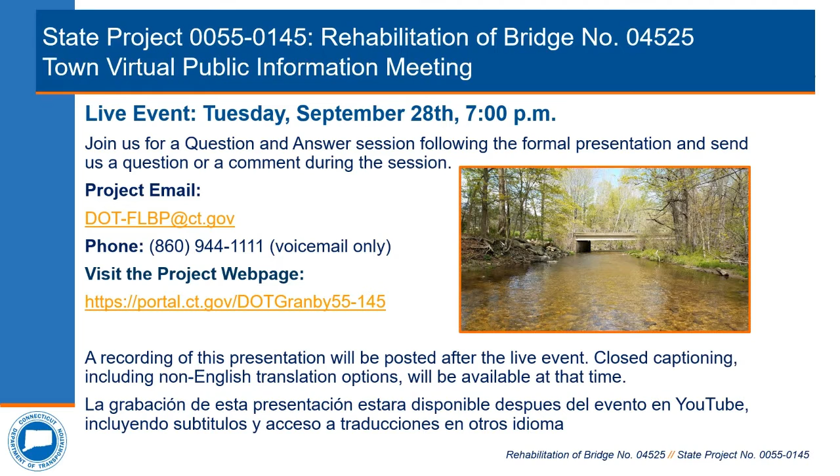On behalf of the Connecticut Department of Transportation and the town of Granby, I would like to welcome you all for attending this public informational meeting for State Project number 55-145, Rehabilitation of Bridge number 04525, located on Simsbury Road over the west branch of Salmon Brook. My name is Preeti Bardwaj, and I am the project manager assigned to this project. We appreciate your willingness to participate in this forum virtually, and we hope that you will find this meeting both interesting and informative.

I would now like to explain some of the goals and format for tonight's meeting. I will be explaining how you will be able to interact with the project team. I will be explaining how this project is funded in the Federal Local Bridge DMS, or Design Managed by the State program. This will be followed by having some welcoming remarks by Mr. Kirk Severance, Public Works Director from the town of Granby. I will then introduce the project design team, and that includes the department's front office leadership, the department's design team, and our consultant liaison engineer team.

This will then be followed with a technical portion of the design, which will include the condition of the existing structure, the purpose and need for the project, and the recommended design solution, which has progressed to a 30% design completion. As part of the department's public outreach program, it is at this point now that we are reaching out to you, the public, while it is still early in the design process, to receive any comments and concerns and answer any questions that you may also have. We also will be explaining the rights-of-way process. And lastly, we will have a live question and answer session.

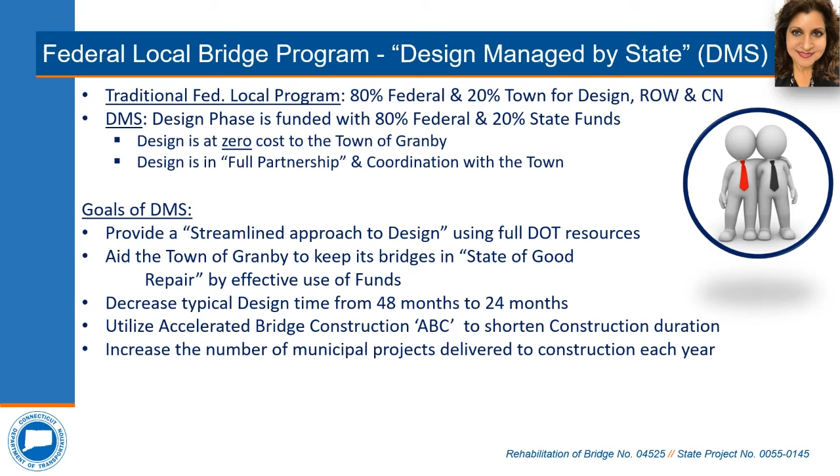Thank you, Preeti. As previously stated, my name is Kirk Severance and I am the Public Works Director for the town of Granby. The Connecticut DOT performed safety inspections for all bridges over 20 feet in length at 2-year intervals. It was determined that the Simsbury Road Bridge was one of the bridges in town needing repairs. We knew that the bridge needed to be rehabilitated, and we are looking for the most efficient way to proceed and stay within the guidelines of the allocated bond money.

Traditionally, the town would have selected and hired a consultant to develop the design, and they would have been responsible for navigating through the design process, with the town covering 20% of the design costs. As mentioned, when the Department of Transportation offered the DMS program to the town, we felt it was absolutely the way to go for the town, since the state has pre-selected consultants with the knowledge of the design process. This would result in both early completion of the design and construction, and not to mention the cost savings.

We started meeting with the state in July of 2019 to get an understanding of how the program worked and how it may benefit the town. After several more meetings with the state, the town recognized that this program would be a good joint effort and agreed to go forward with it.

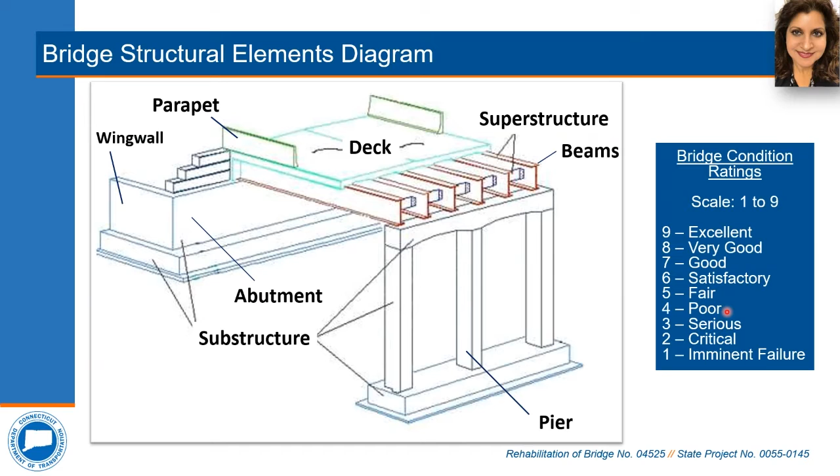Thank you, Preeti. Good evening, everyone. I will be going through some of the specifics of the current condition of bridge number 4525, which carries Simsbury Road over the west branch of the Salmon Brook. I will also present the proposed work under project 55-145, which has been initiated to rehabilitate bridge number 4525.

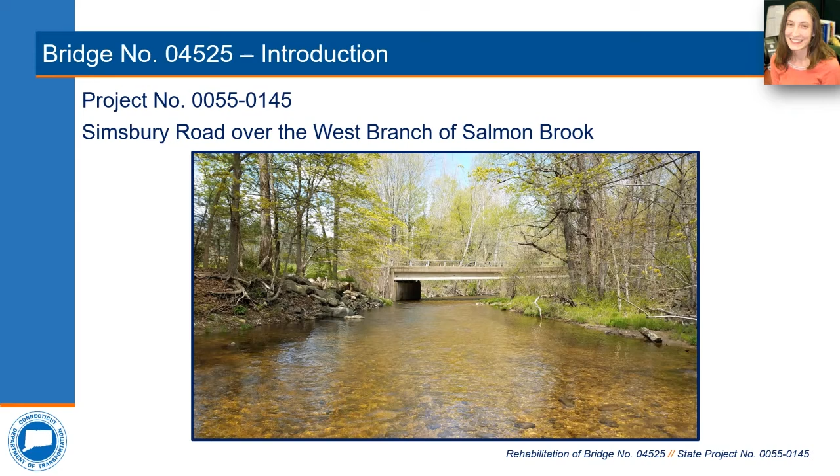Bridge 4525 is located here and carries Simsbury Road, which runs in the north-south direction, over the west branch of the Salmon Brook, which flows generally from the northwest to the southeast. The bridge is located within the West Granby Historic District. However, the bridge is not eligible for an individual historic listing, nor is it considered to be a contributing element to the historic district.

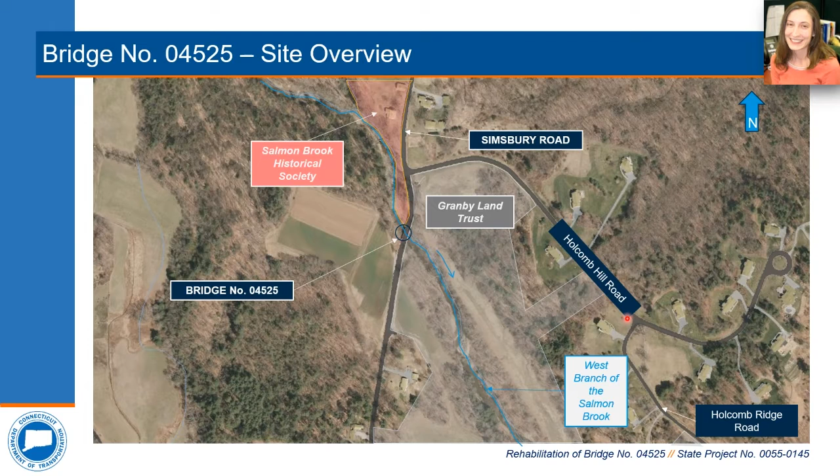The property at the northwest corner is owned by the Salmon Brook Historical Society. The property to the east of the bridge is owned by the Granby Land Trust. Simsbury Road in this area is primarily farmland and residential. There is one residential street, Holcomb Hill Road, located just north of the bridge.

The bridge was constructed in 1956 and carries an average of 1,422 vehicles per day. The bridge has a lane of traffic in each direction, northbound and southbound on Simsbury Road. The curb-to-curb width is 22 feet. The bridge consists of two spans, span 1 and span 2, each with a span length of 50 feet 10 inches. The spans are supported by abutments, south abutment here, north abutment here, and a pier wall in the center.

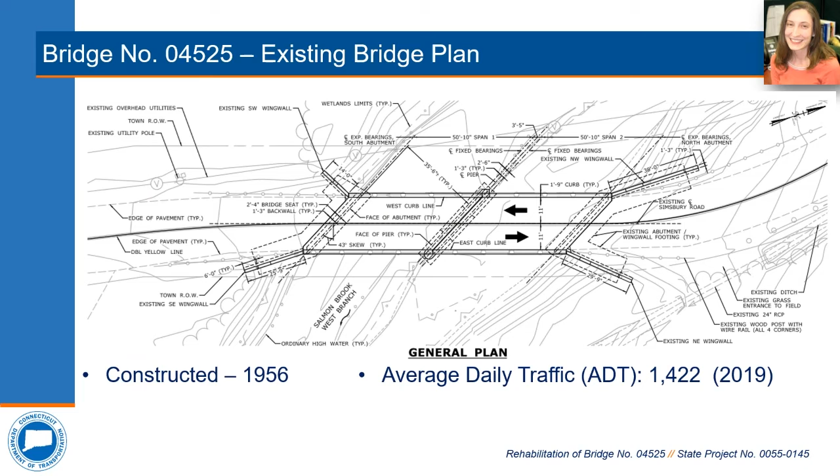On the west side of the bridge, there are overhead utilities. The bridge provides a 22-foot wide roadway, and the superstructure consists of 5 pre-stressed concrete I-beams that support a reinforced concrete slab deck topped with a bituminous concrete wearing surface. On both sides of the roadway, there are bridge rails that consist of steel H-beams and 2 wire cables. This type of bridge rail does not meet current safety standards.

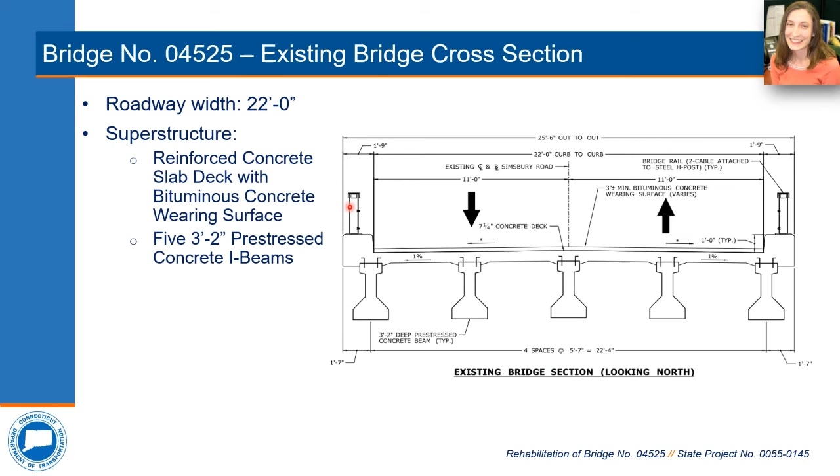The existing bridge has a total length of 111 feet, made up of the 2 spans that are of equal span length. Each span is supported by a reinforced concrete abutment and a reinforced concrete pier wall. These 3 elements make up the substructure and are built on spread footings founded on rock. Because it's founded on rock, scour is not a concern at this site. As for the hydraulic design, for the design storm, which is the 100-year storm event, there is no underclearance and no freeboard on this bridge.

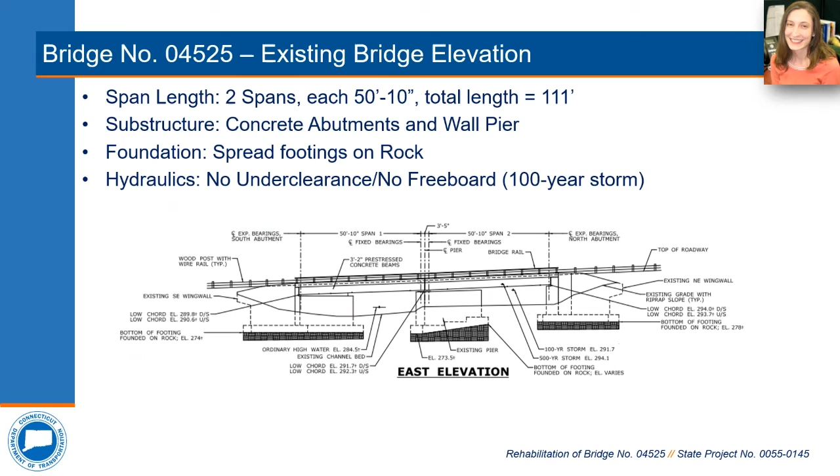As Pretty mentioned previously, during the biennial inspections, the bridge inspectors determine condition ratings for each of the major elements of the bridge. Based on the inspection performed on this bridge in 2019, the deck is considered to be in fair condition. The superstructure is in good condition, meaning there are minor deficiencies noted. The substructure is in fair condition, the approach is in very good condition, and the channel and channel protection is in fair condition. The inspectors also look at other elements of the bridge, such as roadway alignment and deck geometry.

On this bridge, the deck geometry is considered to be substandard due to insufficient roadway width. Because the deck geometry is substandard, the bridge is considered to be functionally obsolete.

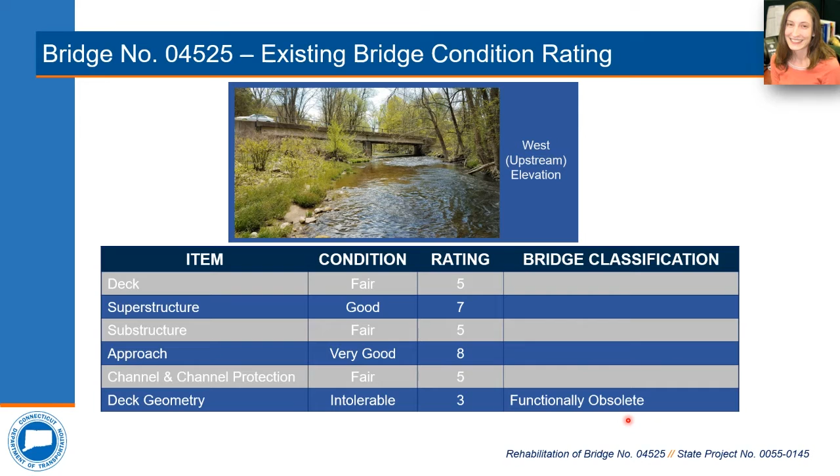So to get you acquainted with the existing conditions of the bridge, here are some photos of the bridge. This photo on the left is the west elevation, or the upstream side of the bridge. You can see here the two spans.

The Salmon Brook primarily flows under this span, span 1. And on this side, there is a lot of sand that's built up and vegetation, mostly blocking off water from flowing under span 2.

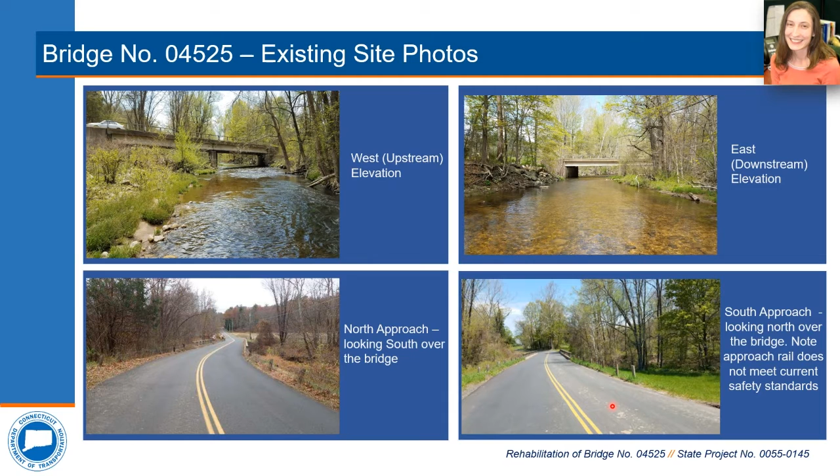Something to note, the approach rail consists of timber posts and two cable wires attached to the posts, and this type of system does not meet current safety standards.

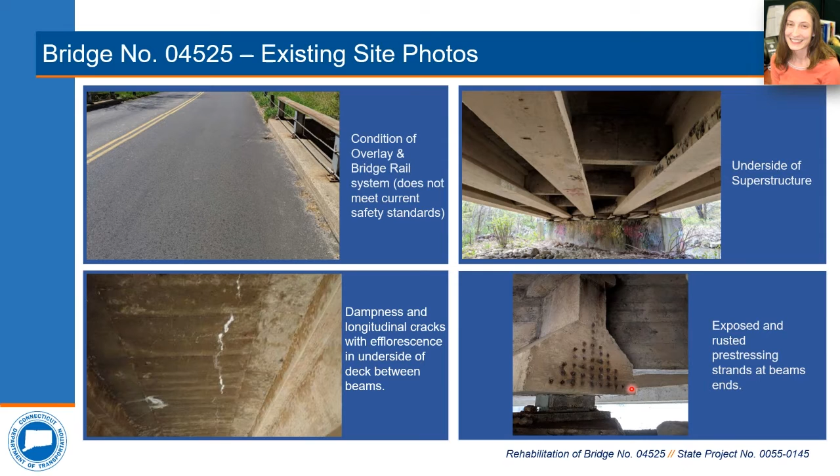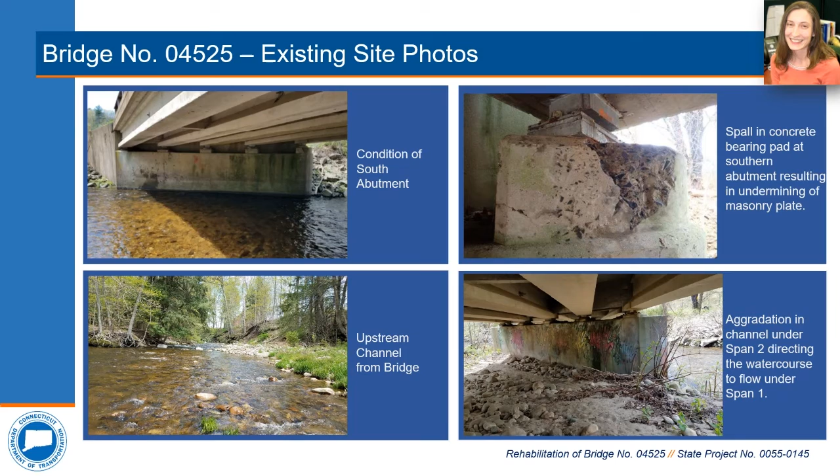So the primary purpose of this project is to address the functional obsolescence of the bridge, which is due to inadequate roadway width on the bridge. The existing curb-to-curb width is 22 feet. Per state and federal standards, a minimum curb-to-curb width of 24 feet is required based on the number of vehicles that travel over the bridge each day, in this case about 1,400 vehicles.

Per town of Granby standards, a curb-to-curb width of 28 feet is required for new local roads with over 60 lots. Since Simsbury Road was built prior to this town roadway standard being established, and no major reconstruction of the road is proposed under this project, less than 28 feet is acceptable.

In addition, the bridge and approach rail systems do not meet current safety standards and need to be upgraded. Lastly, the bridge is 65 years old, and based on the biennial inspection, there are some deficiencies that need to be addressed to extend the service life of the bridge.

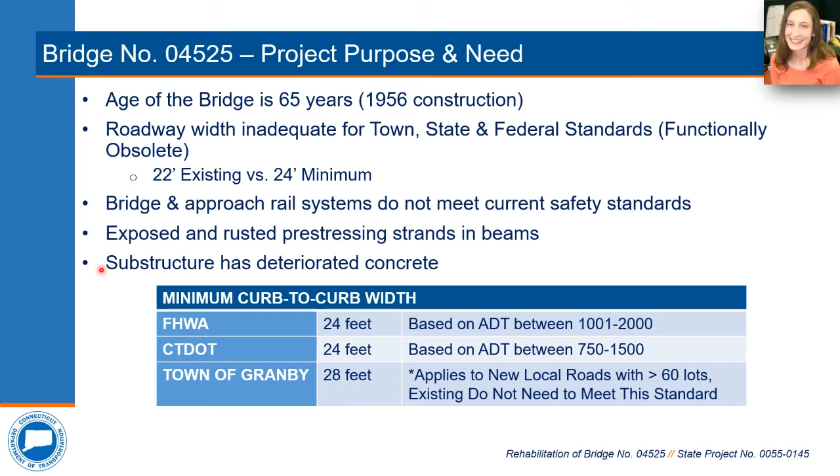Some of these items are the rusted pre-stressing strands in the I-beams and the concrete deterioration in the substructure, especially at the concrete pads under the bearings.

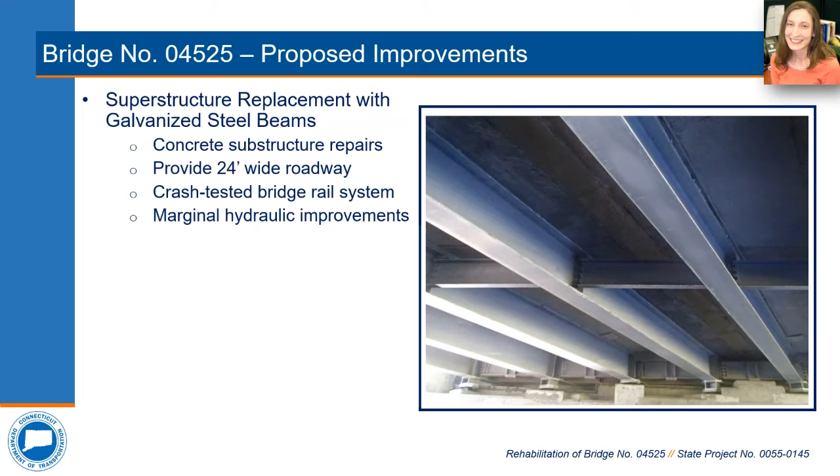In addition, new crash-tested bridge rail will be installed on both sides of the roadway. Also included in this project are concrete substructure repairs to address deficiencies noted in the inspection report. And then with this new superstructure, there are some marginal hydraulic improvements because the superstructure depth is a little shallower than the existing one, so we are able to raise the low chord a little bit to help water pass under the bridge.

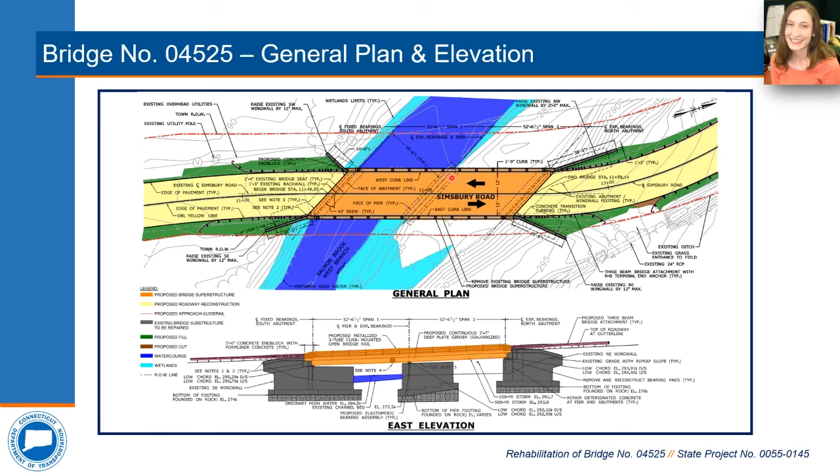Here's the roadway profile that's proposed under this project. We're proposing to maintain the existing roadway profile to minimize the extent of the approach roadway reconstruction on both sides. And as I mentioned, with the use of continuous steel beams, the superstructure depth is slightly shallower than the existing, so we're able to raise the low chord slightly to help pass the 100-year storm better. More water can flow underneath the bridge.

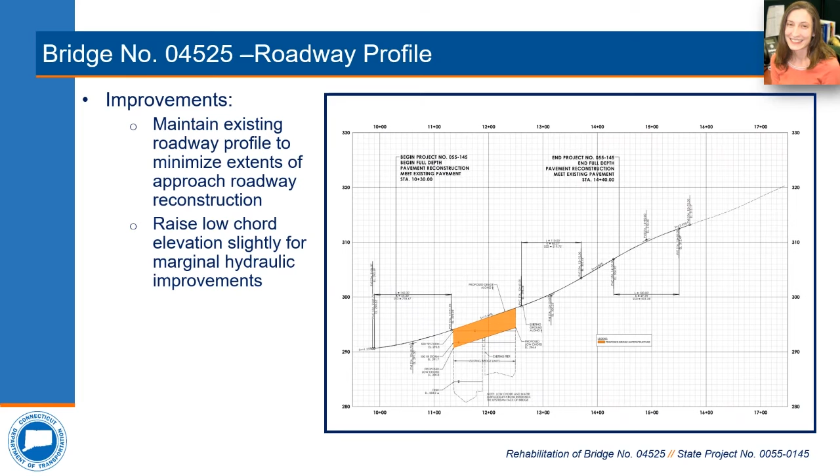On this slide, we have the proposed roadway plan. The orange represents the limits of the bridge superstructure replacement. The darker blue represents the limits of the watercourse, and the lighter blue represents the wetland limits. The yellow on both sides of the bridge represents the proposed roadway reconstruction.

At the south side of the bridge, approximately 115 feet will be reconstructed, and at the north side, approximately 180 feet will be reconstructed. The green and brown represent the fill and cut limits, respectively, associated with the construction of the slightly wider roadway within the project limits. The light gray on both sides represents existing roadway, which will not be altered as part of this project.

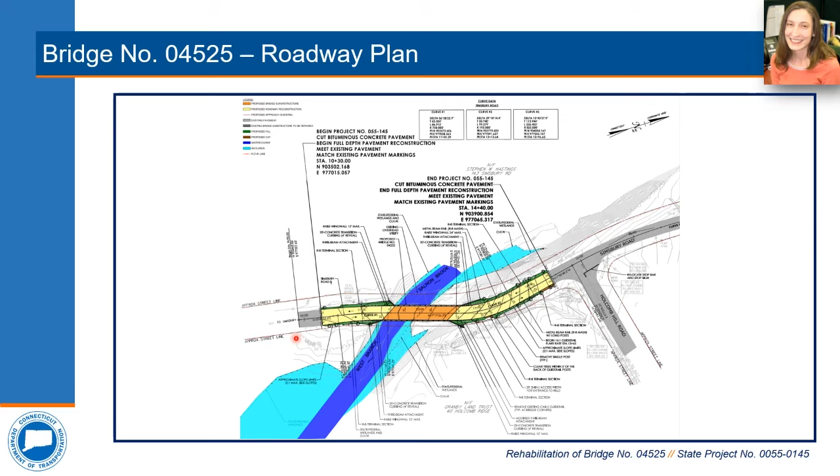To complete construction, the proposed maintenance and protection of traffic involves a full bridge closure with a detour of traffic. This method is proposed because it is far safer for the contractor and workers, as well as for residents and commuters.

With stage construction, the contractor is operating equipment very close to the travel lane, whereas with the full bridge closure, the contractor has the full roadway width, and we don't have to worry about adjacent vehicles being so close to equipment that's moving around.

The detour is proposed to be in place for approximately 7 months, or one construction season, which typically occurs from April through November. The detour route is 6.9 miles long and uses Simsbury Road, Barn Door Hill Road, Route 20, and West Granby Road.

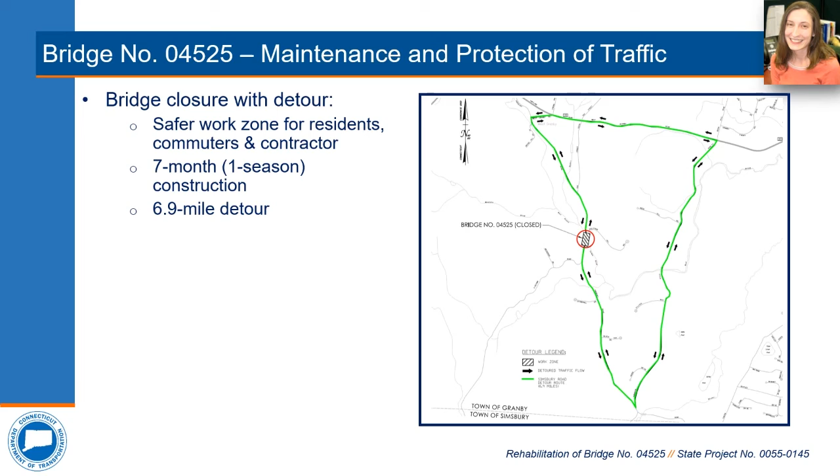As I mentioned previously, the overhead utilities located to the west of the bridge can remain in place throughout construction, so there are no utility impacts associated with this project.

As for environmental impacts, some tree clearing will be necessary on the side of the road to perform the work, but otherwise minimal temporary wetland and watercourse impacts are anticipated.

This is another benefit of the proposed full bridge closure and detour of traffic. The contractor can perform most of the work from the roadway and therefore doesn't need to drive equipment into the watercourse or the wetlands.

So we're anticipating for permits that we'll need a Town of Granby Inland Wetlands permit, flood management certification, an MOU, and a U.S. Army Corps of Engineers permit, either the self-verification or a pre-construction notification permit.

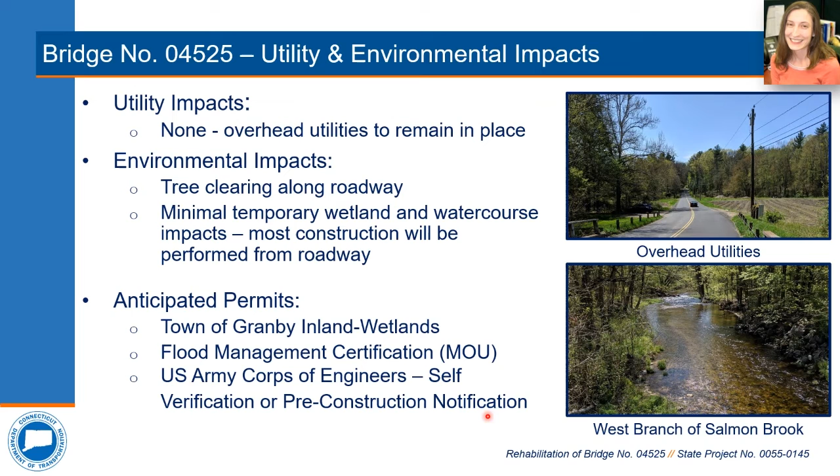As for right-of-way impacts, we generally have very few associated with the proposed project. Most of the work can be performed within the town's right-of-way. There is a portion of the existing northeast wing wall located outside the town's right-of-way, within the limits of the Granby Land Trust property. So a small partial take is proposed to keep that wing wall within the town's right-of-way so that in the future they can access it to maintain it if need be.

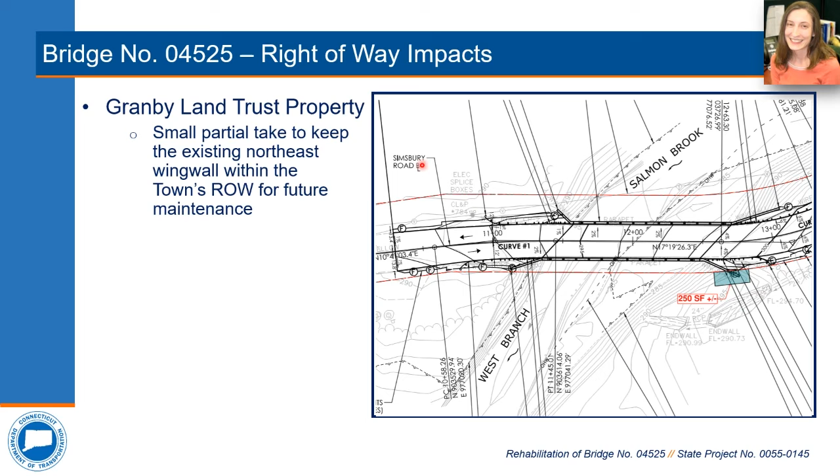So I'm going to turn it over now to Dennis McDonald from the department's Division of Rights-of-Way, and he'll describe a little more in depth the right-of-way process. Good evening, everyone. My name is Dennis McDonald, and I'm a representative from the Connecticut Department of Transportation, Division of Rights-of-Way. I'm just going to provide a brief overview of the right-of-way process.

So the function of the Division of Rights-of-Way is to acquire all property and property rights necessary for the project. This is done in accordance with Connecticut General Statute Section 13A73, 13a-98e, and the Uniform Relocation Assistance and Real Property Acquisition Policies Act of 1970 as amended. Your typical right-of-way impacts include partial acquisitions, easements, and rights. Impacts are subject to change as the design progresses, but this gives a general idea of typical property impacts.

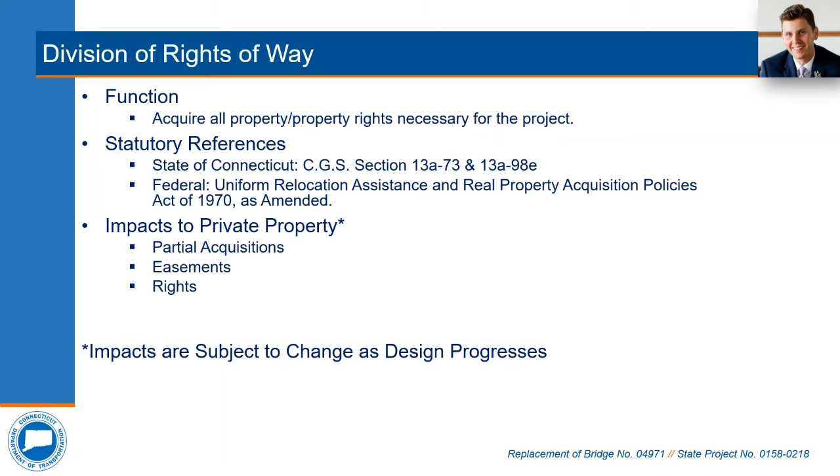Once property impacts have been established, each impacted property owner will receive a letter of intent to acquire along with a property acquisition map. The letter essentially initiates the right-of-way process, and the map provides a detailed overview of the specific right-of-way impacts. Soon after the letter is received, an evaluation process will take place, and once a value has been established, each impacted property owner will receive a written offer of compensation.

Property owners will be given time to consider the offer and negotiate should they wish. If an agreement is reached, an acceptance document will be signed, and a closing will take place at a later date. If an agreement is not reached for whatever reason, the state will utilize its power of eminent domain and acquire the property rights through the condemnation process.

Now, I understand this has a negative connotation, but many times this is done to keep a project on schedule. If the state elects to pursue eminent domain, the original offer is deposited in the court system, and property owners can continue negotiations or file a formal appeal for a reassessment of damages through the court system. Please note all appeals must be filed within 6 months from the date in which the state files for eminent domain.

And that is all I have for tonight. Thank you for your time.

Thank you, Dennis, for the summary of the right-of-way process. So assuming we get approved environmental permits and all right-of-way acquisitions in time, construction is anticipated to start in spring 2024, and again it is anticipated to take 7 months, or one construction season, meaning April through November. The estimated construction cost at this point is $2,120,000. The construction cost will be covered using 80% federal funds and 20% town funds.

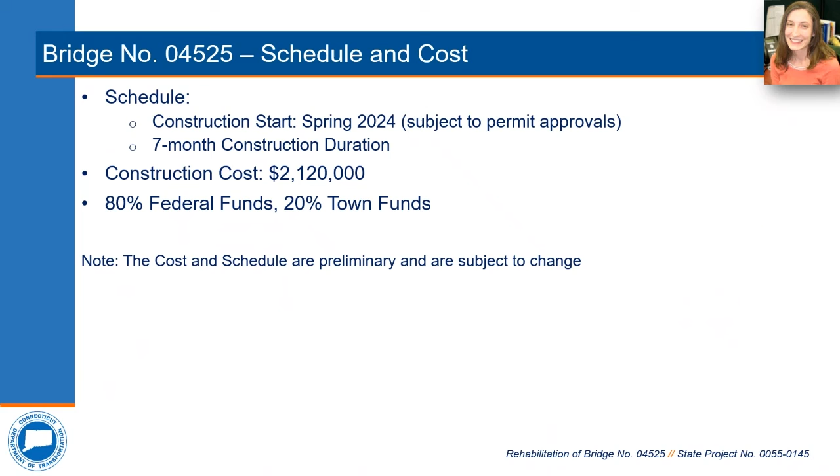Okay, thank you very much, Tracy and Anand. Next question. How will fire, EMS, mail, school bus routes be impacted? Would CHA first like to take this question? And if the town would also like to add anything further to their answer, they're welcome to do so as well. Sure. So one of the things we are going to do during the design phase of the project is make sure that we are coordinating with all the emergency units and emergency services so that they are well aware of the detour route, the actual time of construction, so that they can sort of plan ahead.

And then Kirk, if you could add the town's perspective. Yeah, certainly. We have been working all the way through all three of the bridges with fire, police, and ambulance, and they are well aware of what we're going to need to do. And even prior to construction, we'll have another meeting to make sure all efforts are coordinated. And the Board of Ed is also included. Okay, thank you very much, Anand and Kirk.

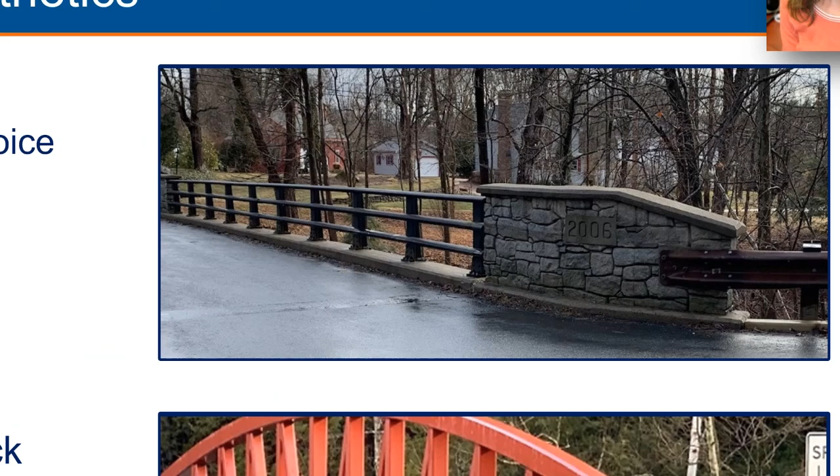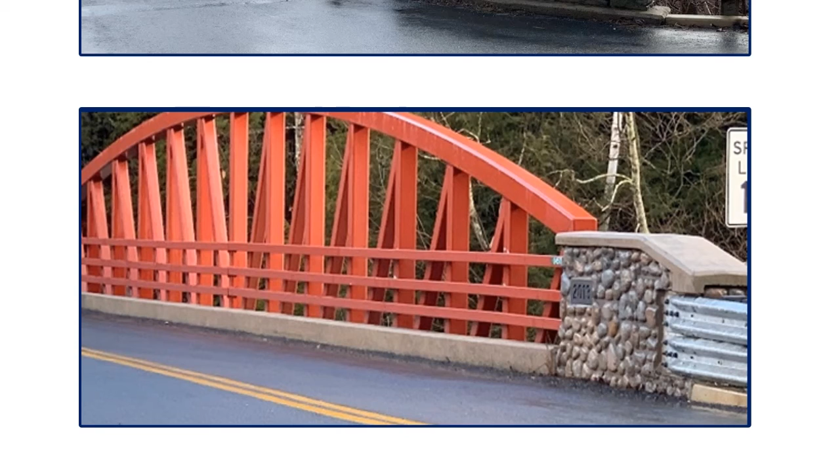And then going down to the next photo towards the bottom, the end blocks, which will be made of concrete, will be formed to have this pattern that replicates the texture or pattern of the town's choice. And again, based on our conversations with the town, they'd like a cobblestone pattern similar to the one shown in this photo here on the screen. Okay, thank you very much.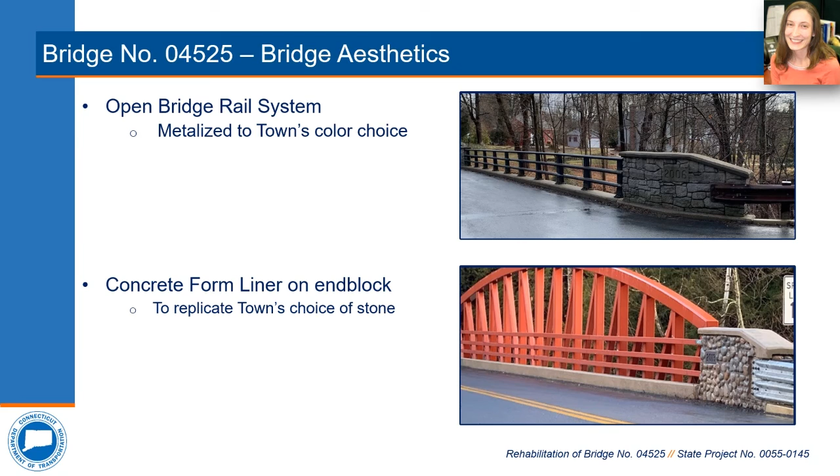We have another question. Given that 100-year floods are occurring more frequently as a result of the climate crisis, would it be prudent to design the bridge to be raised a few inches to make it less likely that it will be overwhelmed by a Salmon Brook flood? Can I have Anand from CHA please take this question? So during our engineering phase, we did look at that. But just before that, I would like to mention that as part of this superstructure replacement that we have proposed, we are going to be marginally improving the hydraulics. And that's because since we're using a continuous steel beam, we are able to reduce the depth of the structure, and so we are able to raise the low chord, which marginally improves the hydraulics.

Now, we also looked at what it would take to meet the 100-year storm requirements. And unfortunately, the requirement is to raise the bridge by over a foot. And even if we do it on the bridge, the impacts to the roadway approaches are significant, and then that leads to other secondary impacts such as rights of way, etc. And so we did not proceed further on that. Again, one other thing is the focus of this program has generally been to take care of the deficiency of the bridge, and so that was the primary focus of this bridge project. Yes, thank you, Anand. And I would also like to reiterate that the federal local bridge program, especially the type of funding that we get for this program, these are funds that we get for spot improvements for a bridge.

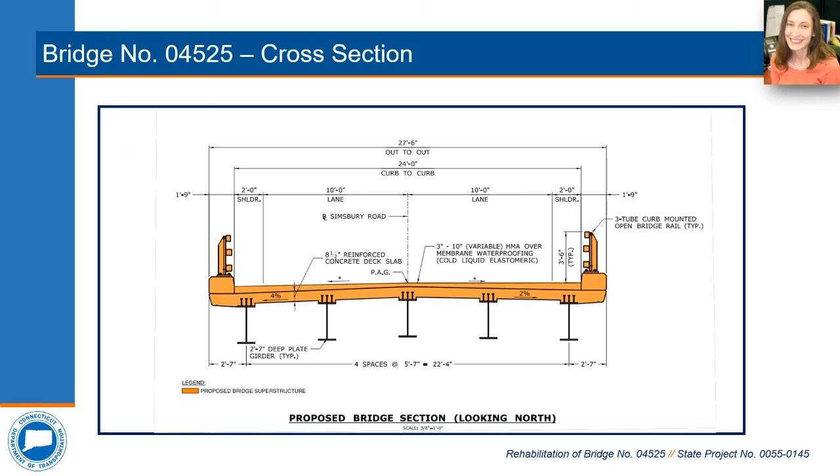All right, next question. Thanks. What about raising it 4 inches or 6 inches, etc.? And I think this is a tag on to the previously answered question about the 100-year flood. You want to add anything else? Sure. Right. So I just want to reiterate that we are improving the hydraulic performance of the bridge proposed versus what it is today.

Again, we try to do a fine balance between what we can do with the project and what impacts we will have as a result. So there are certain components of the bridge, like the concrete deck, that need to be thicker than in the existing condition. And so by maintaining the profile where it is today and reducing the depth of the steel beam, we are able to accomplish that marginal improvement in hydraulics.

And again, all of this was selected trying to balance what we can do on the bridge and the secondary impacts of the bridge. But yeah, there are always options to increase the profile, but the impacts of it can sometimes add up. Okay, thank you, Anand.